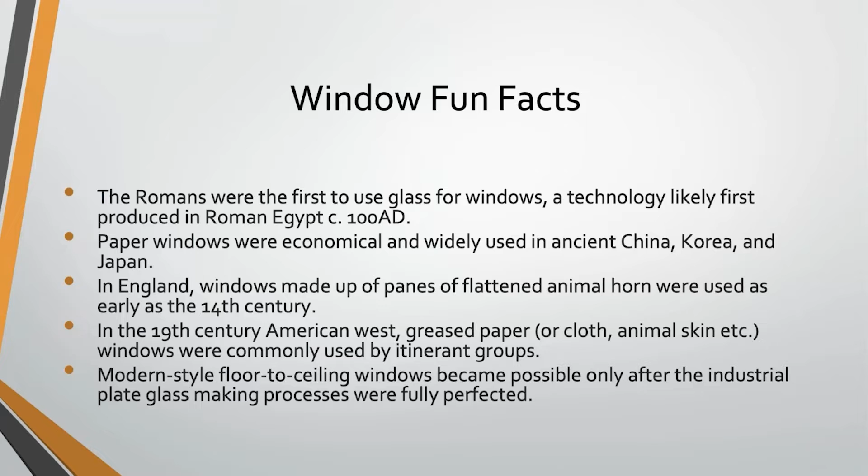What we think of as modern windows only became possible after industrial plate glass, after that manufacturing process was fully perfected. We are going to talk just a little bit about that.

So when you start looking at windows, you have to look obviously at window glass. And this is the part of this that just absolutely fascinated me. The first ever known glass was obviously black and volcanic, and it was used by prehistoric people - obsidian - for making weapons, jewelry, and money, things like that.

The earliest glass manufacturing started about 3500 BC, long before windows came into vogue, in Mesopotamia and Egypt. That region actually became kind of the world glass manufacturing center for the next 500 years or so. Manufacturing that glass was a very slow and difficult process because they could only do it in very small furnaces, naturally fired and then heated by bellows, coal, wood, things like that.

But that eventually changed when what's today modern day Syria introduced the blowpipe, making the process faster, easier, and cheaper. But this very early primitive glass wasn't used for making windows because it was very small batch production. It was mostly used for making vessels, jewelry, and housewares, essentially. It's not until much later that we actually start to use glass in windows.

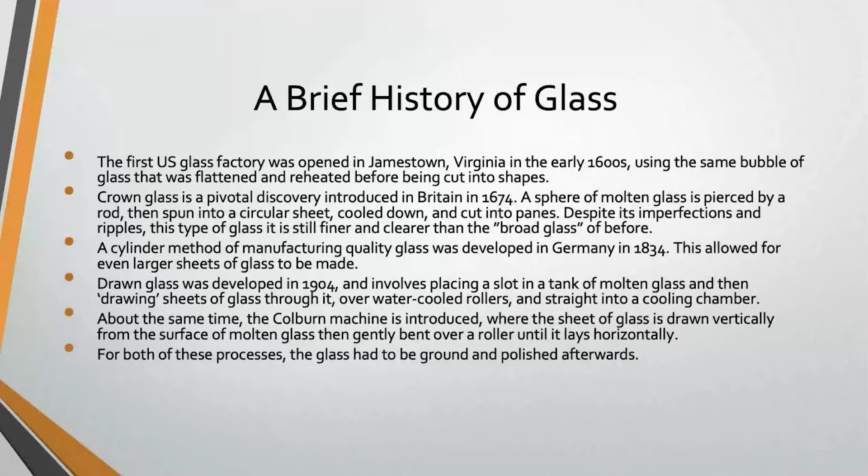At about the same time, there's something called the Colburn machine that's introduced, where a sheet of glass is drawn vertically from the surface of molten glass and then gently bent over a roller until it lays horizontally. Kind of the same idea, a little different process, but for both of these, the glass has to be ground and polished afterwards to make it clear and really see-through.

It's essentially invented by a French chemist named Edouard Benedictus, who discovers laminated glass when the glass beaker he's working with, which has a plastic material inside of it, a cellulose nitrate, drops to the floor and shatters, but the glass doesn't break into pieces. He's essentially inventing modern safety glass.

So that process of inserting a thin plastic film between two sheets of glass allows for the development of large sheets of what we would today call safety glass.

It's not until the mid 20th century that our most modern method of producing glass is invented by a guy named Alastair Pilkington, who invents what's called float glass, which is still how we make glass today, at least in large sheet form. They do that by pouring molten glass onto a bed of molten tin, literally liquid metal. That glass then floats, spreads out on top of that tin, and you can take it off the end of that hot molten metal bath and form large sheets of clear glass with it.

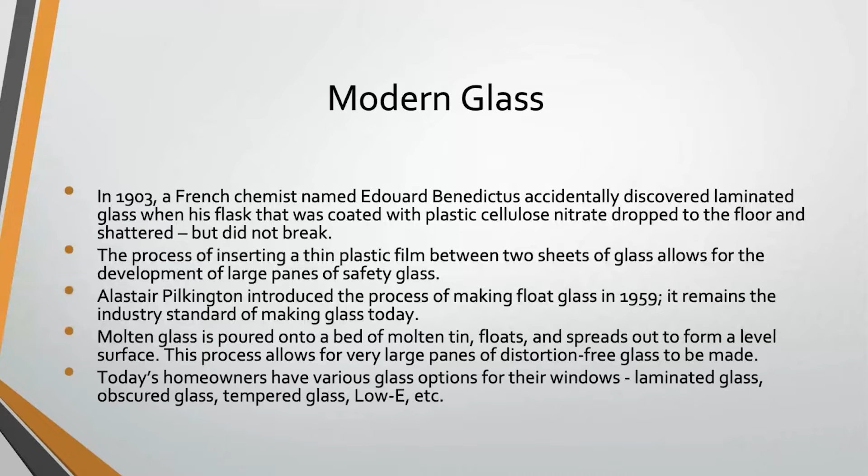Now that we know a little bit about glass, let's talk about the evolution of windows. We're going to start in relatively modern times because, like so many other things, windows didn't change much for hundreds or thousands of years. So let's go back to colonial America and start looking at it from that point of view.

Colonial windows were typically small casement windows, often paired with wood or brick mullions, the centerpiece that divides two windows, separating the rotating sashes of those casement windows. The frames would have been made from either wood or iron and featured diamond-shaped leaded or rectangular panes, because in colonial America we could only manufacture small translucent pieces of glass.

Vertical sliding sashes, what we kind of think of as a more modern window, were developed by the 17th century. The earliest versions were single hung, and by the end of that century, by about 1700 or so, double hung sash windows had become a fairly dominant style.

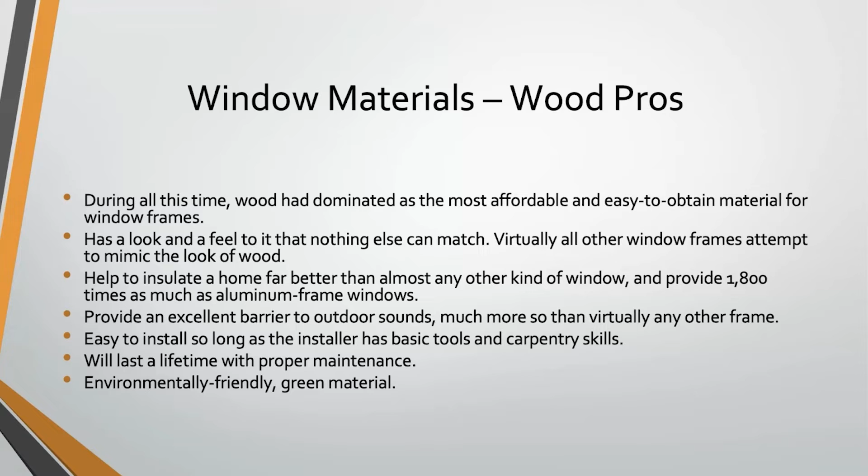Wood windows will last a lifetime with proper maintenance, but that's the catch - you've got to do maintenance on them. And wood is obviously an environmentally friendly green material.

There are some cons, however, to wood windows. They require maintenance, and if you do not properly care for them, they will twist, they will swell, they will eventually rot, especially styles which may trap moisture. Casement windows, which we see often on higher end houses, tend to trap more moisture than, say, a double hung window does because of the design. So the biggest problem with wood is that it requires maintenance, and if you don't maintain it, eventually it's going to rot. It's also vulnerable to insects, especially termites, although not limited to termites. Proper maintenance helps ward off those insects.

And wood windows these days are not cheap. They have a higher initial cost than a vinyl or steel framed window, but will last longer than most other types of materials, and wood never rusts or corrodes. So wood actually has a lot of pros to it - the biggest downside is you've got to maintain it or it will rot.

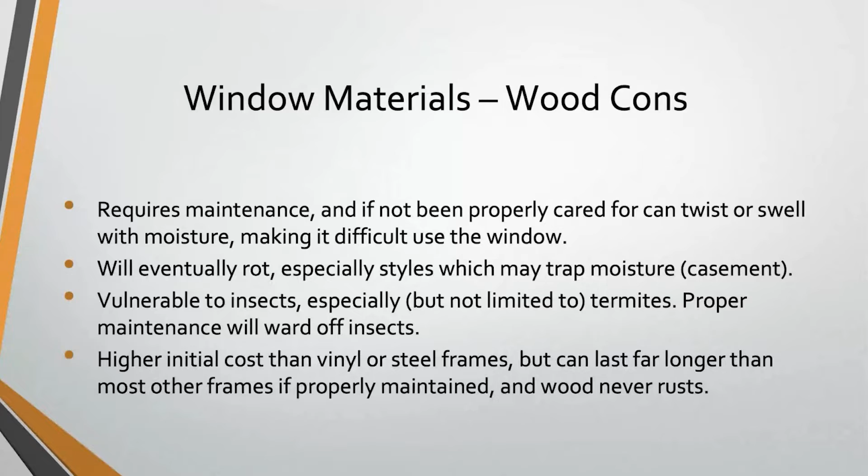Other window materials, aluminum and metal, were popular for quite a while in the 60s, 70s, and early 80s, specifically aluminum. It was one of the cheaper options for new windows, its only other competitor was vinyl. Aluminum is durable and can withstand the elements. It's not prone to moisture absorption or other rot issues.

It's very easy to maintain, especially compared to wood. You never have to paint an anodized or baked-on finish aluminum window. Because it's a strong metal, you can have a lightweight, slim profile that you can customize. Aluminum windows are very long lasting with warp resistant construction and very solid mechanical joints, and they came in lots of different colors and styles.

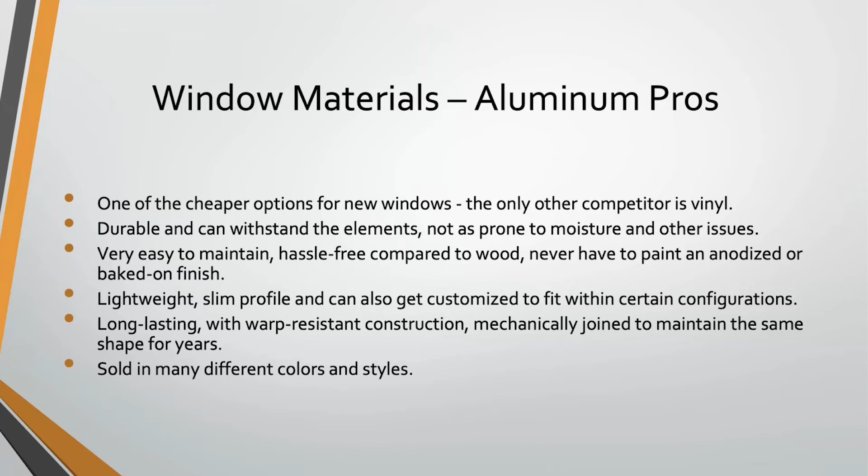Having said that, there were a lot of cons to aluminum windows, and they have very much fallen out of favor. They have a high U value, which means they easily conduct heat and cold, and in some ways they are considered the least green of all window types, at least in terms of efficiency.

They were very prone to interior condensation and are also cold to the touch in the wintertime. The very first house I ever owned had aluminum windows, and I absolutely hated them because they were freezing cold in the wintertime. Aluminum is durable, but it will eventually corrode somewhat when you expose it to moisture, especially if there's any salt, like if you're near the ocean.

In the 70s and 80s, aluminum was considered a cheap building material. Keep in mind, the manufacturing of aluminum windows has improved drastically over the last couple of decades, and you absolutely still can buy them out there, but we don't see them much in the residential world anymore because of the temperature conduction problems with them, and they kind of got a bad rap.

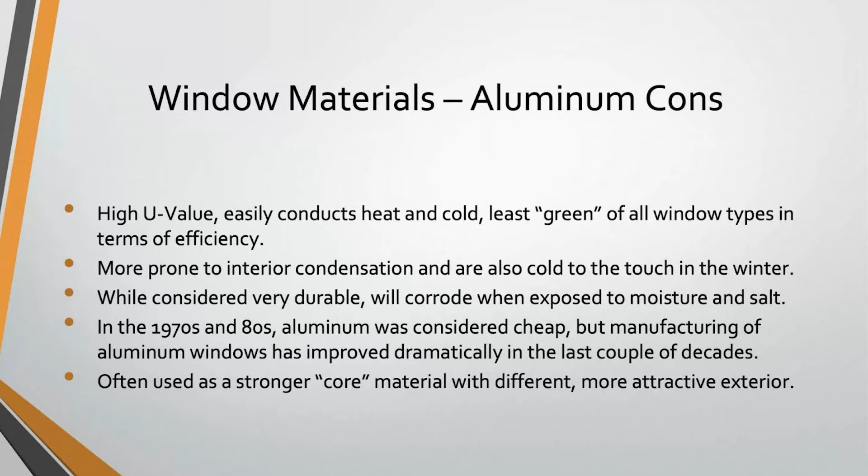Moving into the most modern materials we see, vinyl windows are basically the vast majority of what's being installed in houses today. A vinyl window is the most cost-effective type of window available today. They can be very energy efficient because that vinyl resists the conduction of heat and cold. They can be Energy Star rated. They can come with low E glass. They can be a very high quality window. They're easily installed, especially when we're replacing existing windows, so they make a really good replacement window.

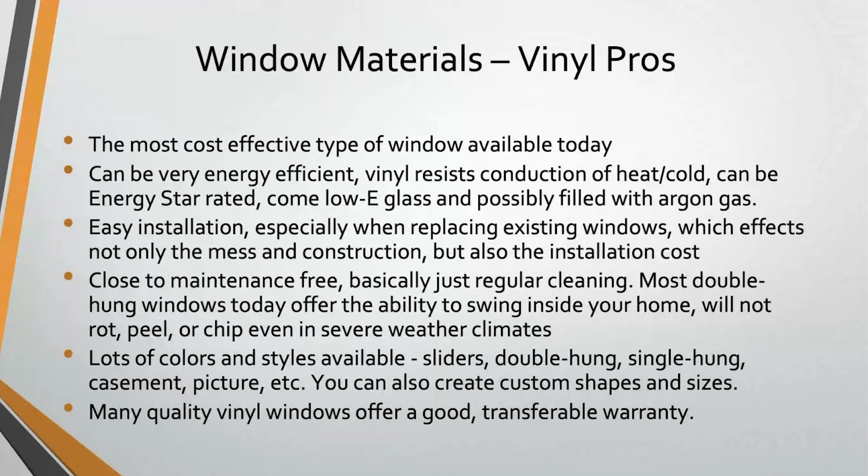They are close to maintenance free. It's basically just regular cleaning, maybe occasionally some lubrication or replacing a counterbalance that goes bad. Most double hung windows today offer the ability to unlatch and swing into our houses, making cleaning and maintenance on them really easy. They come in lots of colors and styles, and quality ones actually offer a pretty good transferable warranty. So, what are the cons of vinyl windows?

They're the most popular type of window today, but that increased demand means lots of different manufacturers and lots of different levels of quality. So homeowners need to be really vigilant when it comes to vinyl windows to make sure they're getting a good quality one, because the cheap ones are just cheap plastic windows. That wide variety of prices and quality means that for the same size, you could pay 200 bucks for a window, or you could pay 800 bucks or even more for that same size window, and with that come differences in quality. So lots of different price points, but the cheap ones tend to be really cheap.

Also be aware that, like everything else out there, most companies sell different lines of windows with the same manufacturer's name on them that will vary greatly in quality. Another downside, vinyl looks like vinyl. You can't really replicate a wood window with it. Vinyl is cheap to manufacture, keeping window prices low, but it is plastic. It's not a natural quote unquote product, and it does have an environmental impact to it.

We see recycled vinyl used in some windows today, but that really cuts down on the quality and durability of those windows, just like when you use recycled vinyl in siding. It's just not as high quality a product as using a virgin vinyl material. So those windows tend to warp and sag more, especially in the heat. And vinyl is naturally kind of soft. It's not naturally a structural material.

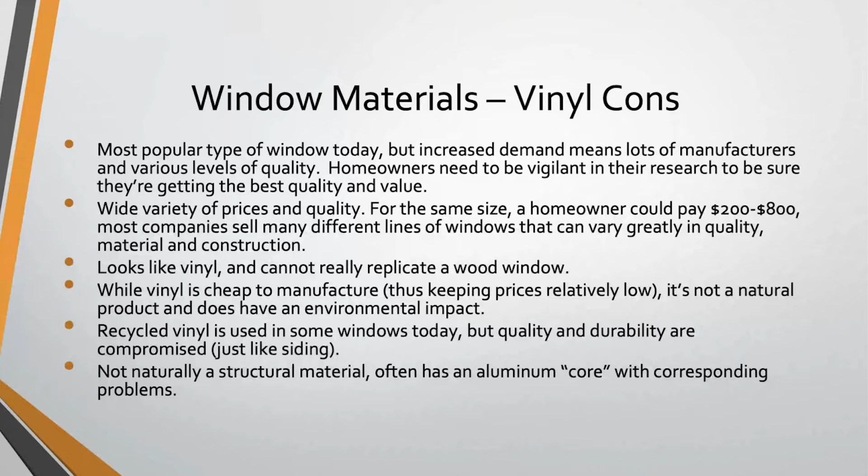So for a higher quality vinyl window, it has to be a really complicated extruded shape, or it has to have some kind of aluminum or metal core to it, making it more complicated to manufacture. So the problems we tend to see with vinyl windows tend to be more in the cheap vinyl window range, where it's a lower quality window using a lower quality material and cutting corners to bring down that window cost. And when you do that, if you have, say, a casement window, you can get warping or twisting of that frame, especially in the summer heat, because that vinyl is not structural and it actually softens up a little bit when it gets hot.

And then our final kind of modern window material is actually what we're going to call a clad window. This is typically now a wooden frame with some kind of vinyl or fiberglass cladding on the outside of it, or maybe even an aluminum cladding on the outside of it.

All of those are actually pretty common materials. So what that gives us is a nice looking wood window on the inside. It's well insulated because that wood frame is a really good natural insulating material. They're really good at cutting down on noise transmission. So if you're in a busy location, near a street, near an airport, maybe near train tracks, a clad window might be the window for you.

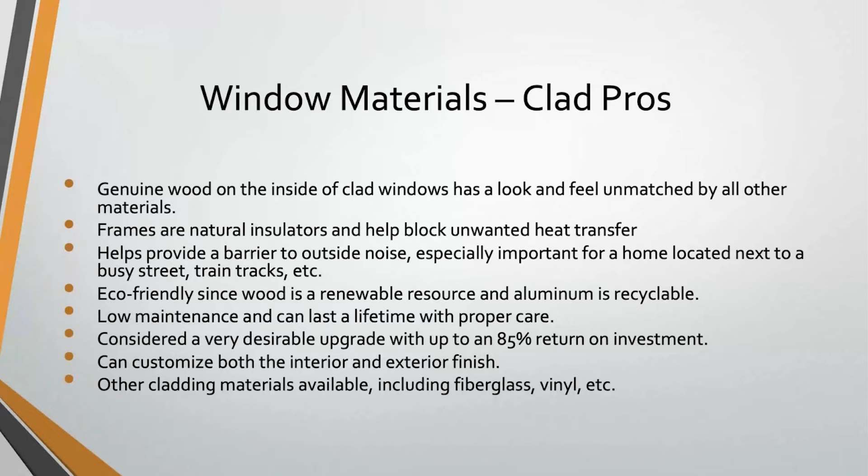In addition to that aluminum cladding, which is so common, you can get a fiberglass clad window or a vinyl clad window, although you will go up in price for those. So aluminum clad wood windows, when we talk about clad windows, are still the most common ones that we see out there. Like anything else, though, there are some cons with those aluminum clad windows. They are expensive, with an average cost of roughly starting at $1,000 per window up to $1,800, $1,900, $2,000 per window, depending on the size, shape, and quality of that window.

That aluminum cladding that we so often see is conductive and it will transfer heat and cold and lower the efficiency a little bit, especially compared to a good quality vinyl window. Clad wood windows are low maintenance, but they are not maintenance free. They do require regular inspection, cleaning, and caulking.

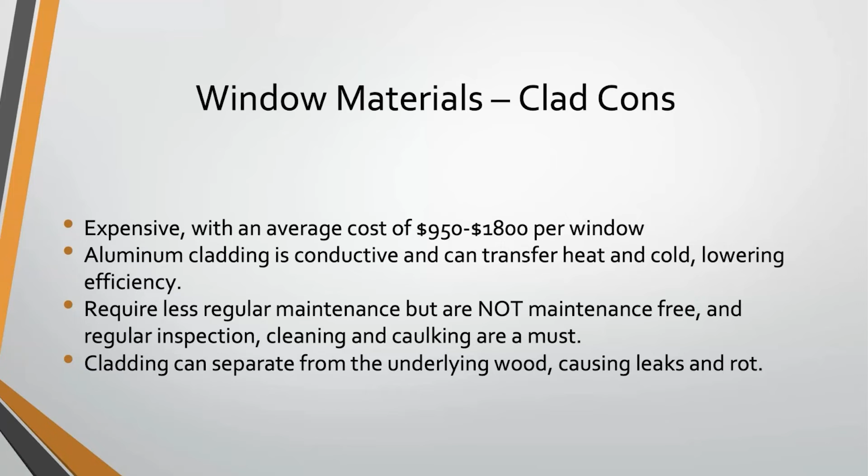All right, let's switch gears here and talk a little bit as we start to wrap this presentation up. Let's talk about window seals, because when we asked you guys for your questions on windows, I think easily half, maybe 3/4 of the questions we got were about window seals. So let's talk about failed thermal seals in windows. First of all, real quick, what is a failed thermal seal? Why does that thermal seal actually exist?

So what we're talking about here are either double pane or maybe even triple pane windows, where we now have two panes of glass separated by usually a piece of some kind of rubber, and then with air or some kind of inert gas in between it. That's called a thermal pane window. And the idea behind those is to make your window more efficient. So with that air or that inert gas in between that window, it cuts down on the window's ability to conduct heat and cold and makes for a more efficient window.

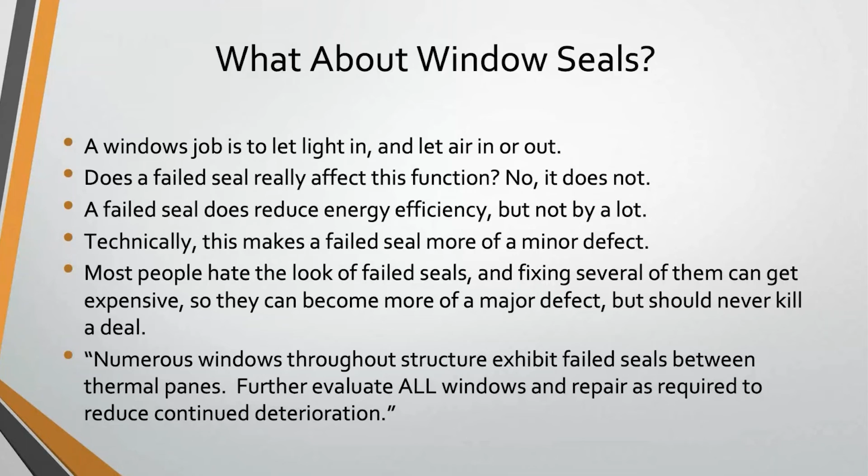You guys have all seen failed thermal seals before. They can look like this. They can look like this. They can sometimes be very difficult to diagnose. And that's why we're going to write up basically all the windows in the house and make them a general condition if we identify more than one of them in any given property.

All right, real quick, let's talk about some questions we received, and then we will be done.

We had a question: any brands you recommend or don't recommend? There are a ton of window brands out there, some of the more reputable national brands - Pella, Marvin, Peachtree, some lines of Andersen windows. Andersen makes really cheap windows, they also make really good replacement windows. All of those are pretty decent national brands. Having said that, there's also a lot of really good, relatively local brands of replacement windows out there as well.

Are windows rated for heat rejection or gain? Yes, they are. That's called the U value, and you can actually customize windows depending on what climate you're in. If you're in a cold climate, you might want a window that lets in more heat in the wintertime from the low-hanging sun in the sky. If you're in a hot climate, you may want a window that's tuned to reject all heat from the outside of the house.

Windows are rated for heat rejection or gain. That's primarily captured in what's called the U value.

Do you write up every window with a broken seal on an inspection report? No, we do not, and we absolutely should not be calling out every individual window with a broken seal. If we miss one because it's not visible during an inspection, they're going to try to complain to us. We'll tell them our visual inspection agreement specifically precludes that, and the responsibility to fix one that wasn't noticeable during the inspection falls on the folks who built or bought that house. So no, we do not call out every individual failed seal during an inspection. That's actually the wrong way to report that condition, and I know inspectors do it all the time, but not doing that is actually the sign of a good inspector.

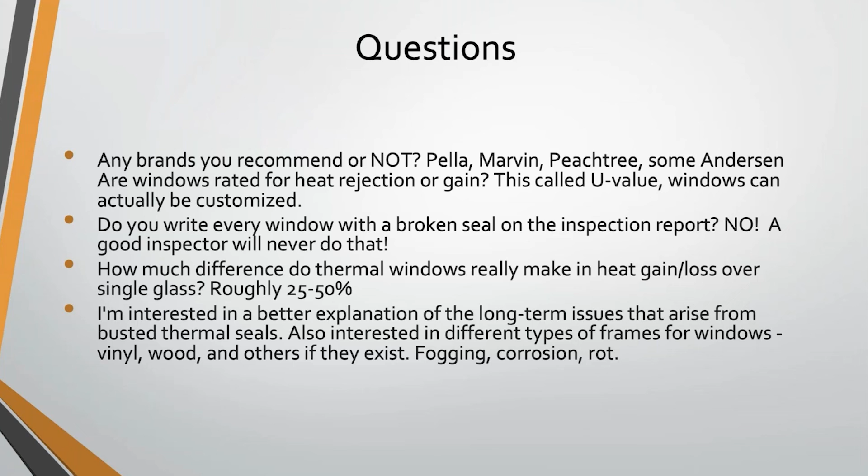A better explanation of long-term issues from busted thermal seals: over time, a failed thermal seal lets a little moisture accumulate between the glass, which can result in fogging, and eventually corrosion or rot of that window. But it takes a long time for those conditions to occur.

Is a busted thermal seal a failed window? One or two of them is a relatively minor item in an inspection report, so in my mind it's not necessarily a failed window. It's just a failed thermal seal, and it can be repaired.

What are some solutions for fixing rot under cladding on windows? If it's minor and just starting, it can be relatively easily repaired by digging out the rot, filling it with some kind of epoxy, and re-adhering that cladding. If it's gone too far, you'll have to replace the sash or casement part of that window. That's the only way to fix it.

For windows you can't get parts for anymore, you have to modify or replace the windows if you truly can't get parts, but there are a lot of parts available for windows out there.

Pros and cons to replacing older windows: if the windows are in good shape, there are not a lot of pros to replacing them, except maybe if you're dealing with aluminum frames or you want some noise reduction. Keep in mind that in terms of energy efficiency, even replacing old single pane wood windows, it's going to take more than 50 years to pay back those windows, and they'll probably be ready to be replaced in about 20 years. So you're never going to get that money back in terms of energy efficiency.

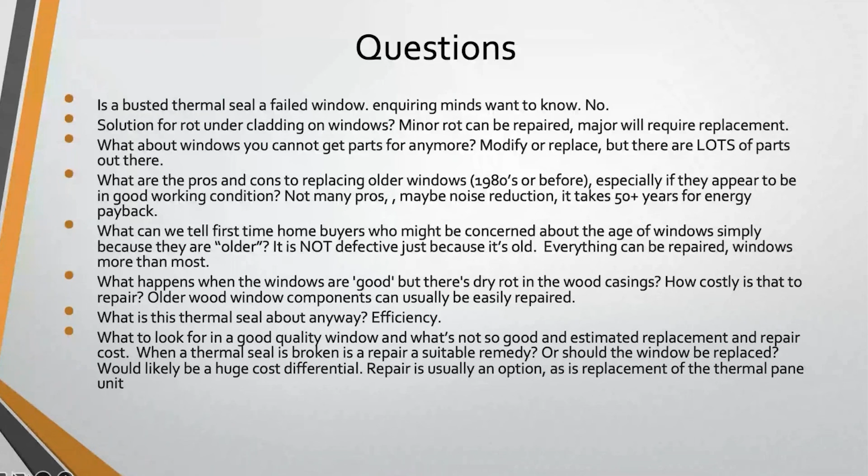All right, that's the end of the questions I've got. So I've managed to go about 12 minutes over our ideal time frame here. Windows, as I hope you guys can see now, are an absolutely fascinating subject. I hope this was 42 minutes well spent for you guys.